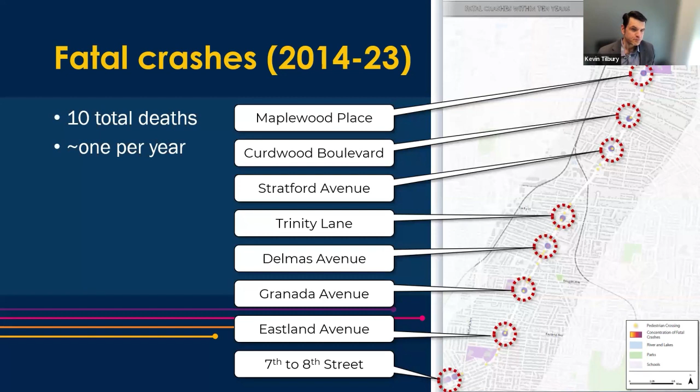So the question we want to throw out to you is, of the deaths that you see represented here in the corner, how many of those do you think are acceptable? And of course, the answer to that is none of them are acceptable. So the question then becomes, why do we design our streets for pedestrian deaths? And that's the whole point of the Vision Zero movement.

So you may have heard of what's called Vision Zero. Nashville has developed a Vision Zero action plan, and essentially what that says is that no fatalities or severe injuries are acceptable, and that we're going to design our transportation system so that it eliminates those and provides safe and healthy transportation options for everyone.

So what is it about safety and corridors? One of the things that we do know is that there's a direct relationship between vehicle speed and safety, and this little chart shows you what we mean by that. At certain speeds, if you're a pedestrian and you get hit by a car, there's a really good chance that you're not going to survive. So our ability to provide a safe experience on Gallatin Pike and Main Street depends on our ability to encourage appropriate motor vehicle speeds.

So what are some of the problems that we're seeing with that today? Well, one is that the design of the street encourages higher motor vehicle speeds. You've got this big, wide, expansive pavement that you can see here on Main Street, and that's because there's a lot of undefined pavement space right now. That creates this big, long, straight stretch of roadway that encourages motor vehicles to go faster. It's only natural. So that's one dimension of it.

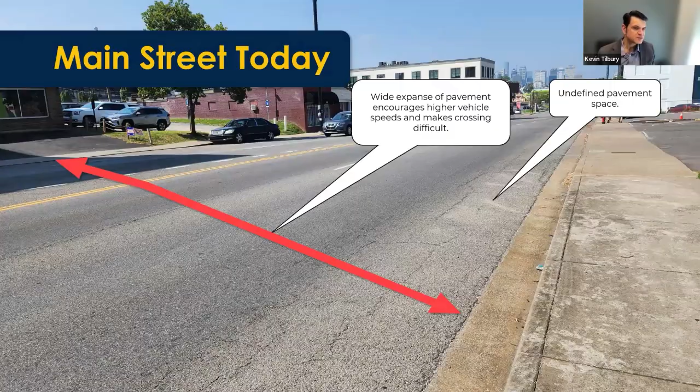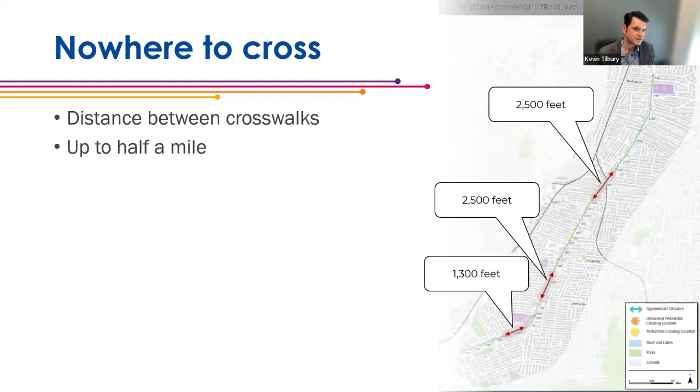They're probably going to try and cross somewhere in the middle. And what we've seen with the crash data is that a lot of the fatalities and injuries are at those locations where there is no safe crossing.

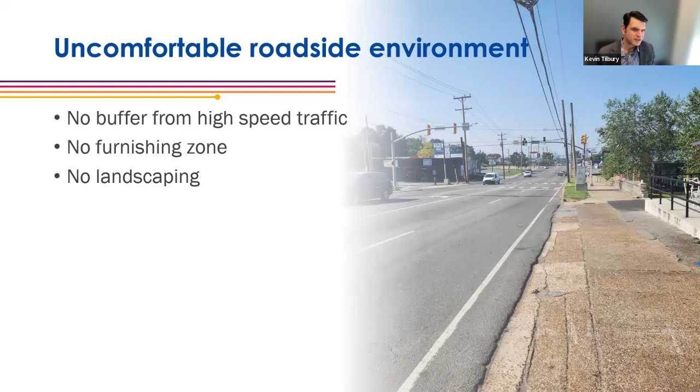Really, just generally, even if there is a sidewalk, walking on the street right now is not very comfortable. It's not a place you would want to be. There's not really a buffer from the traffic that's speeding by, and there's no street furnishing zone with landscaping and street furniture and things like that. So it's not the best experience.

This is an example. Our team went out and walked along Main Street last year and took some video, and this is what our experience was like. We could barely hear ourselves talk to each other because we were so close to the roadway. So it's not a good place right now if you want to get out and get a cup of coffee, walk to school, walk to work, or any of those things.

Now, we do know that it is a popular corridor for all types of travel. It's the second highest ridership route in the WeGo system, and there is great service on Gallatin Pike, but we could do better.

We've also looked at the trip data in the corridor, and what we're seeing is that a lot of the trips are less than a mile, less than 2 miles in length. These are trips that could be done by walking and biking instead, but a lot of those are probably being taken via car today because, as we said, it's not a great experience to walk or bike in the corridor. So we definitely have potential to create walk and bike trips.

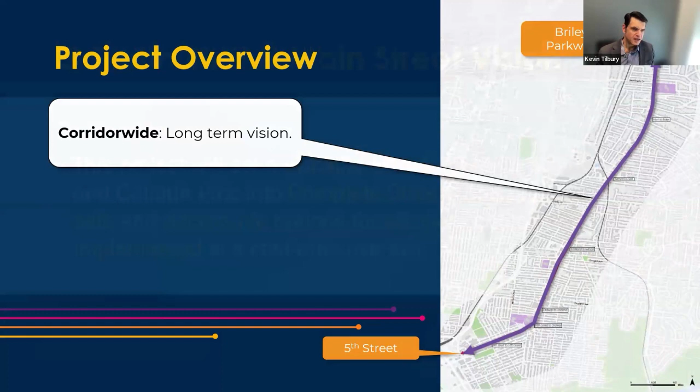This is the segment that is the focus of this project, and our goal is to develop a long-term vision to transform Main Street into what we call a complete street. And what we mean by a complete street is that it will provide safe and comfortable options for all the modes that we just talked about.

So if you want to ride the bus, if you want to walk, if you want to bike, you have convenient, safe, and comfortable ways of doing that. So that's the goal of this project.

Now, we've been underway for the better part of a year now, so we wanted to share a little bit about what we've been up to this point. I'm sure many of you went to the workshops at the end of last year. We had 2 public workshops in December, and then later in January we also went out and talked to WeGo riders. We've had an online survey, and we've talked to some business owners along Gallatin Pike and Main Street, and we've collected their feedback.

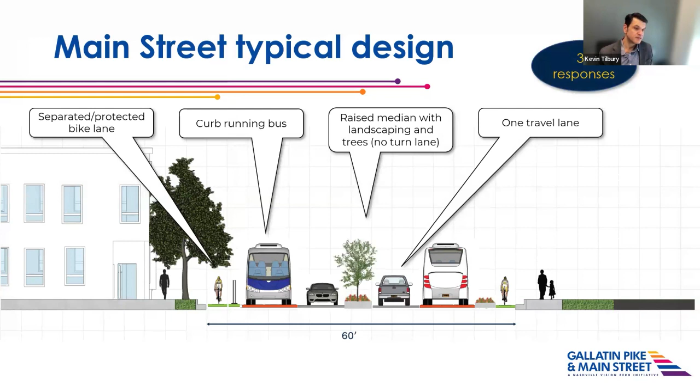So one of the things we did at the workshop is we asked people: if you could design a Gallatin Pike and Main Street in the future, what would it look like? And this is what people showed us. This is Main Street, and you can see what they said is essentially, they wanted to see bus lanes, they wanted to see facilities for bicycles. So more of that multimodal street, that complete street that we talked about.

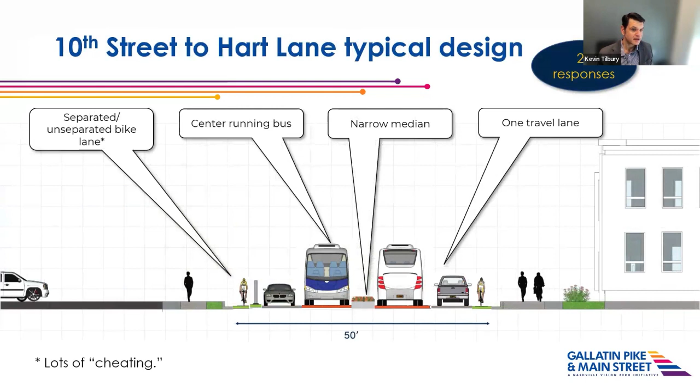This is a little bit further up, just north of 10th on Gallatin Pike, and you can see a very similar design. And then even a little bit further north of the CSX line up to Briley Parkway, you can see something very similar.

We also asked you to tell us what your priorities were for Gallatin Pike and Main Street, and we gave you about 13 or 14 options and said, stack them up.

Tell us what your most important thing is. What's your next most important thing?

More generally, some of the things we've heard from talking to residents, business owners, and people who visit the corridor are that parking and access are important. We want to make sure we address traffic, and some things having to do with the aesthetics of the corridor like landscaping and lighting. Again, we heard a lot about pedestrian crossings, all those types of things.

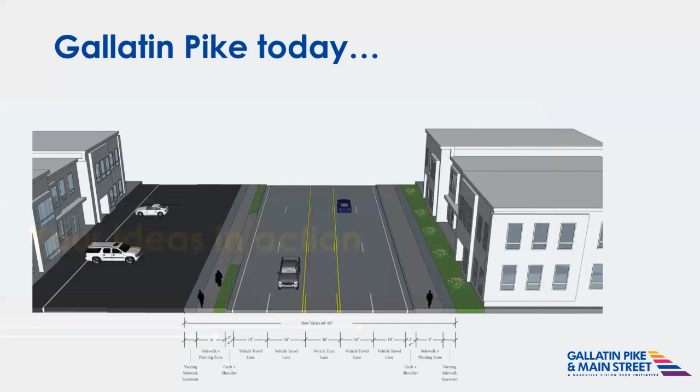This is Gallatin Pike. It varies, Gallatin Pike and Main Street, depending on where you are specifically. But generally speaking, this is what it looks like: you've got 2 travel lanes in each direction, what people call a suicide lane or a 2-way center turn lane, and not a lot of stuff on either side of the road or either edge.

So we came up with 2 different concepts for the corridor, 2 different visions of what Gallatin Pike and Main Street could look like.

Here's the first option. We're calling this concept A. A couple of things to point out about this design: instead of 2 general travel lanes in each direction, one of those lanes has been focused on use for buses. Buses would get priority in that lane, but cars could make right turns from that lane. So if you wanted to get in and out of a business or make a right turn, you could do it from that lane, but otherwise it would just be for buses.

People would get on and off the bus via the curbside. That would do a couple of things too, because the buses don't travel as frequently as the cars, it would create a more gentle buffer between the sidewalk and the general travel lanes. You get a little bit of a buffer there, and it would also provide more priority for buses to be able to travel and not get stuck in congestion.

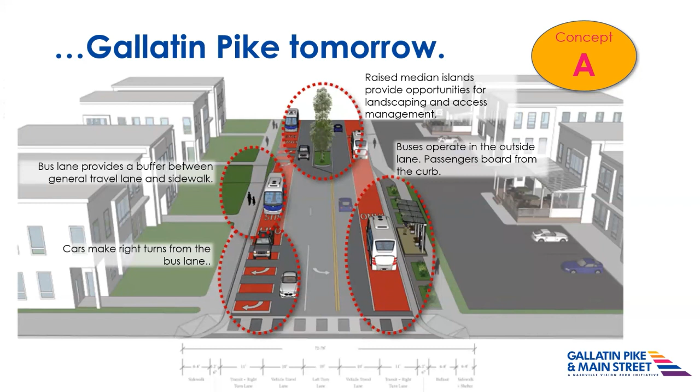The other thing is that we've kept that 2-way center turn lane there, but with a couple of variations. In addition to being able to make left turns, we've also identified the ability to put in what we're calling raised median islands. Those give you the ability to put in landscaping, they help calm traffic, and they can be better and safer locations to cross the street.

The other thing I'll point out is that we're trying to be as cost effective as possible and as least disruptive as possible. By doing that, we're not going to move the curb except for some very specific situations. For the length of the corridor, we're trying to keep the curb intact from one end to the next, so that it's not as costly or as disruptive as a bigger project would be.

All right, so that's one concept. This is another concept or idea that we came up with, and we're calling this concept B. You'll notice there's a bus lane in this concept, but we moved it to the center instead of operating at the curb. That'll make the bus move more efficiently. The other thing this concept does is allow for a dedicated bicycle facility for the whole length of the corridor, with buses operating in the middle and a bikeway or bike lane from 5th all the way up to Gallatin Pike.

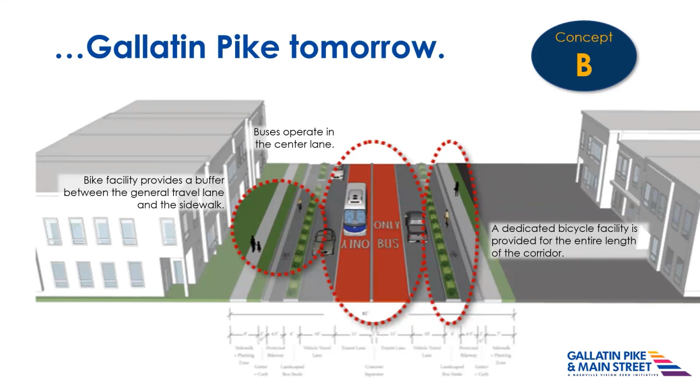It'll look different depending on where you are in the corridor. This is the section near Main Street, I think on Gallatin just south of Ordway. There's enough room there to put in a protected bikeway, but a little bit further north, that might be a delineated bike lane instead. It varies.

The other difference with this concept is that you wouldn't be able to make left turns to or from the corridor, except at very specific locations where you would make U-turns to get to different places. We'll have more information on that in a minute.

So that was a high-level overview of two different ideas for the corridor, and I see you have some questions—we'll answer them in a minute. But I wanted to point out that later this week, everything I showed you and more will be on the project website, giving you the ability to explore the concepts in more detail. If you registered for this webinar, we'll send an email with a link to the website where you can explore further. On the website, you can look in detail at every section along the corridor and understand what it would look like under both concept A and concept B.

For all the priorities we talked about—crossing opportunities, roadside experience, transit priority—there's an FAQ describing the differences between each concept for each priority, and that'll be up there too. You'll be able to explore more detail, and we also want you to give us feedback. There's a survey where we'll ask you to tell us what you like and don't like about each concept, and what elements are really important to you versus less important. You'll be able to provide feedback via the online survey as well.

I'll bring this up so we can illustrate some of the things Justin's talking about. Here's the bike lane behind the curb that he mentioned, and the bioswale, the ability to put in a bioswale here. I'll keep this up so we can talk a little more about it to answer your questions, if that would be helpful.

Thanks, Kevin. The next one is more of a comment, but also a concern: restricting left turns in certain places and having to make U-turns on a busy road was one of the greatest objections to Gallatin Pike's AMP. So just a comment.

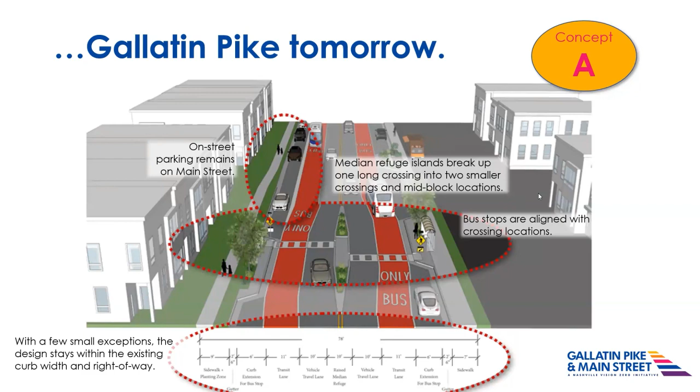Yeah, so this is one of the key trade-offs. One of the things we're looking at—Kevin mentioned some of the benefits to the center bus lanes in terms of transit speed—there's also some safety benefits. So we're looking at the number of collisions that occur on the corridor because of the multiple conflict points of people being able to make left turns in a lot of different places from different directions.

That's something to consider. But again, like you're saying, it does produce a situation where folks are going to have to maybe go a little bit farther out of their way to get to their destination in order to make a left on the corridor. They might have to first make a right and then go to the next signalized intersection and make a U-turn. So it's going to add some time for people driving to access destinations on the corridor.

And I'll add that's exactly why we have two different concepts, so that you can see what some of the trade-offs are. In this case, it would be a little less convenient to make left turns, but the trade-off is that the corridor would be a little safer overall. So all throughout there are little trade-offs to be made in comparing the two concepts, and what we're interested in is getting feedback like what you just gave us, so we'll know what the preference is for each concept.

Okay, next: does Ellington Parkway have the capacity to handle increased traffic flow at all times, considered for traffic diversion from Gallatin Pike?

I'll let Kevin chime in here, but I'll highlight that the general design approach we're taking is to try to reduce speeds on Gallatin Pike. Both of these concepts will help do that by narrowing the roadway, some visually narrowing, incorporating medians, bioswale buffers—all these sorts of things we know can help contribute to lowering the speed on the corridor. And then, of course, we also identified that there are gaps in crosswalks and inadequate crossing facilities. So that's another aspect of this: making sure that as we improve these intersections and add these other elements, we're creating an improved crossing facility, so that those treatments combined with an overall reduced speed make it much more comfortable to cross the street on the corridor.

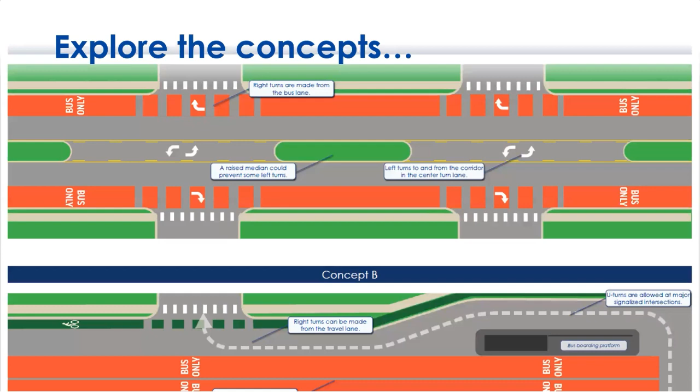So certainly that's an option for the center running. There could be that with the curbside that could potentially be there, but it would be the same sort of situation with the bike lanes, where anywhere there's a driveway, there couldn't be a separation. Kevin, I don't know if you have anything else to add there.

You called it. So the image I'm showing here on the screen, you can see that where the pavement width will allow it, there is a raised median separating the bus lanes in the middle. So yes, that's possible. But as Justin said, because of the need to provide access, there would not be a physical separation, a physical barrier, at the curb.

Is implementation dependent or will it be affected by the transit referendum decision? Since this was identified as a BRT route and those concepts, what happens if the referendum doesn't pass?

We started working on this project before any conversations about a referendum for November had been occurring. This is a vision project for the corridor, so construction of the entire corridor is not funded. Whatever happens in November could provide an avenue towards funding part of this. Right now our focus is on establishing that vision for the corridor, which could then inform how future design and construction of a transit project on the corridor could look.

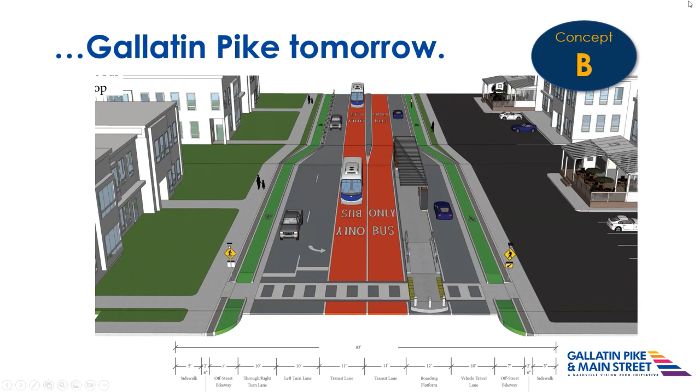A couple of comments about the bike lanes. Can you add a concept with the bike lanes in the median to help avoid the driveway issue? And then some notes that the parallel routes don't seem exactly parallel, and there's no dedicated bicycle facilities on neighborhood streets. So would those be included in the project if concept A moves forward?

Maybe Anna wants to answer a little bit about that, if you can unmute her. Thank you. Oh, that was quite the gate there on the mute.

So yes, the alternative parallel bikeway would be improved with intersection improvements and traffic calming, so that it was a high quality, low stress bikeway adjacent to Gallatin. One thing I've been pointing out to folks is the parallel bikeway can move separately from whatever happens on Gallatin. It can either be an additional bikeway or a separate bikeway. It's not necessarily tied to this project, but it could be implemented with this project. We're trying to track that mobility need along with this project.

Thanks, Anna. Do you want to hit on spokes too? Yes, so the Spokes project on Woodlands, South 10th Street and South 5th Street provides a mini network closer in, further south and west in East Nashville, and provides that connection to downtown, parallel to a Gallatin transitway or bikeway.

I want to touch quickly on the question of the cycle track as well. We have not looked at a concept for a center running bikeway. We have looked at a few concepts for a shared bus bike lane or a shared bike driving lane. So I think the question would be, how safe, calm, comfortable, low speed is Gallatin itself in order to make a concept like that work, knowing there would need to be transitions at signals and things like that.

I'll add on the center concept. It's not something we've explored, but it's something we can look at. You're right, it reduces the conflicts with the driveways. The trade-off is that it reduces the ease at which a cyclist can access destinations along the corridor, so it can be a little more difficult to get to and from your destination that way. But it's something we can definitely take a look at.